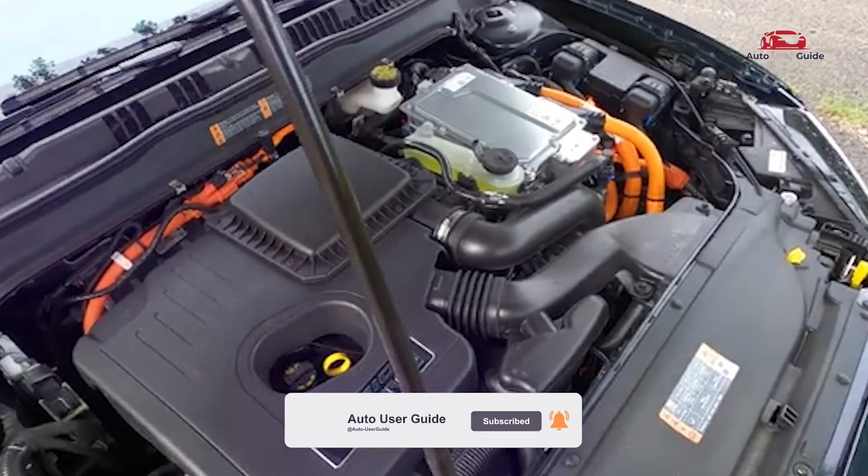In this guide, we will explore essential details about the 2020 Ford Fusion Hybrid fuse box. Where can you locate the fuse box in your vehicle? How do you interpret the fuse box diagram? What are the different fuse functions and their corresponding locations?

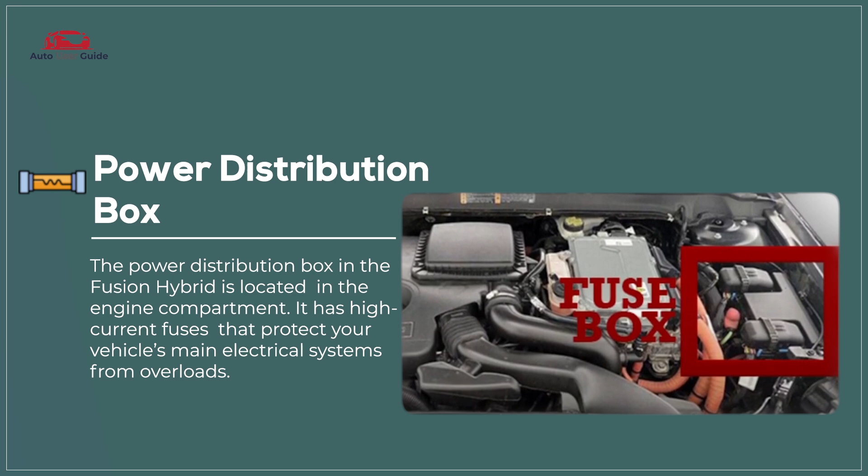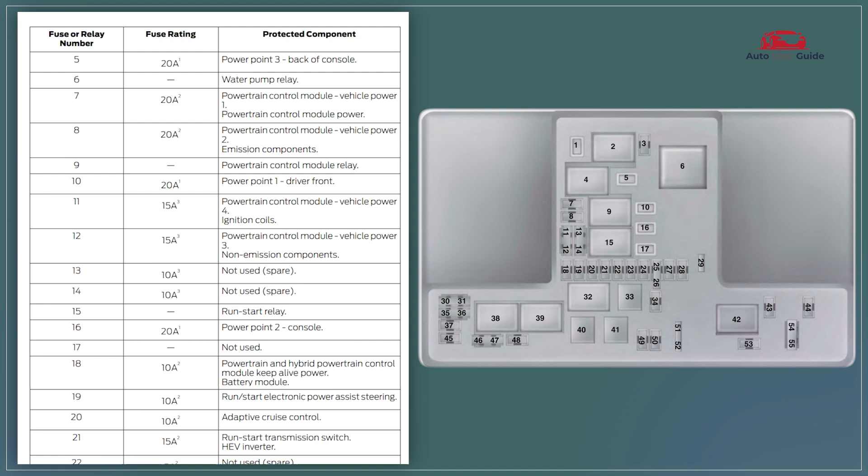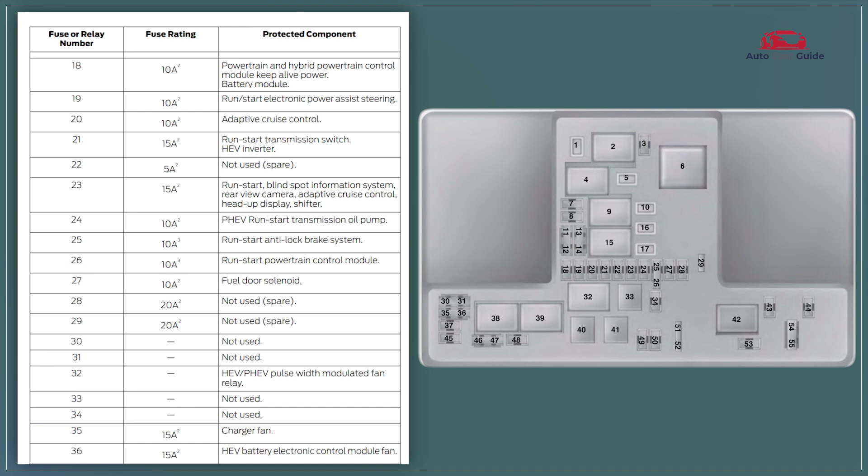Power distribution box. The 2020 Ford Fusion Hybrid power distribution box contains fuses and relays for efficient power management, featuring a compact design for easy access under the hood. It also includes protective covers for enhanced durability and safety.

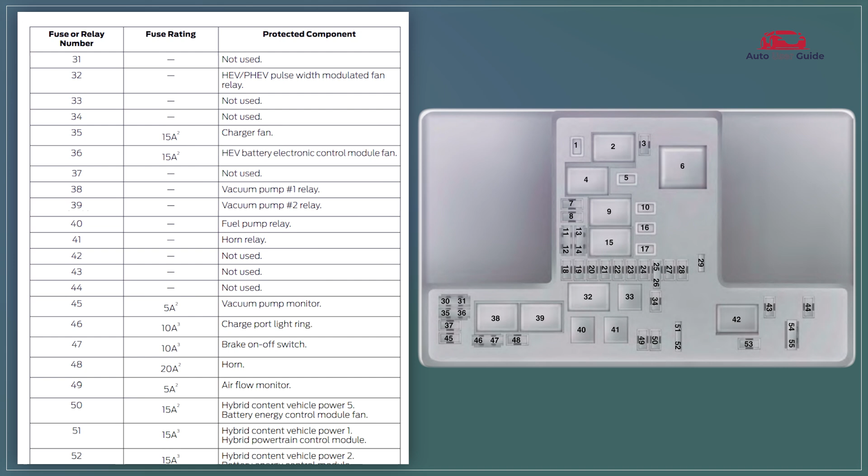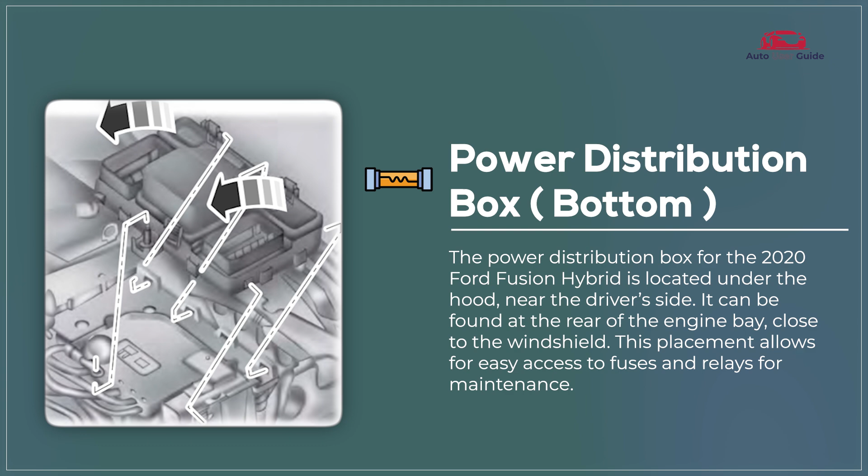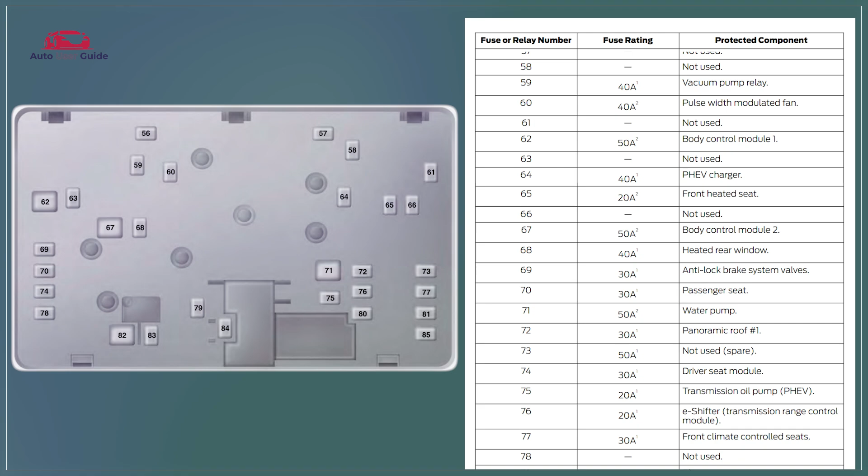Power distribution box, bottom. The bottom power distribution box of the 2020 Ford Fusion Hybrid contains fuses and relays for key electrical systems, ensuring efficient operation. Its durable design and strategic placement provide easy access for maintenance and enhanced reliability.

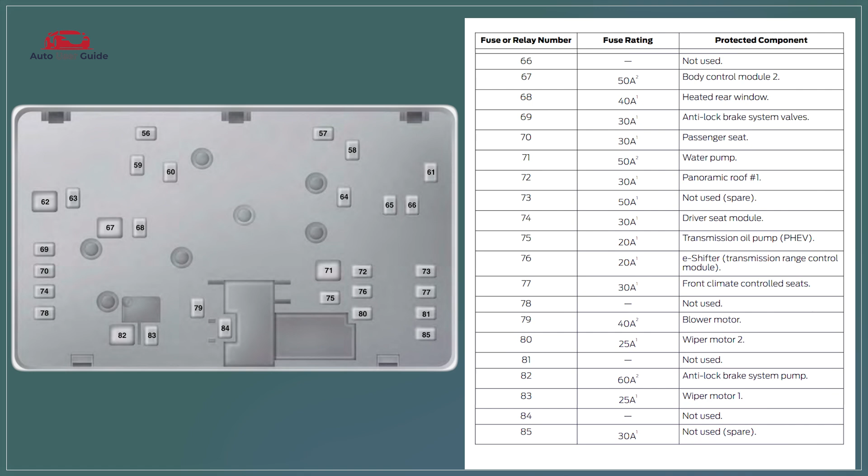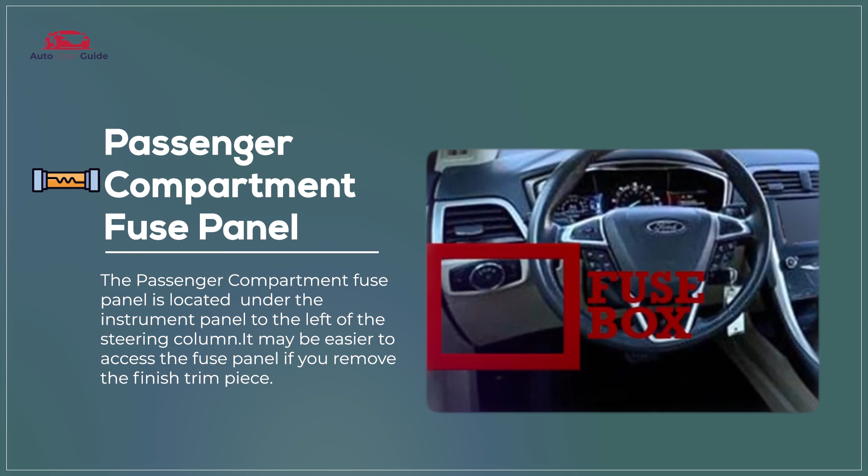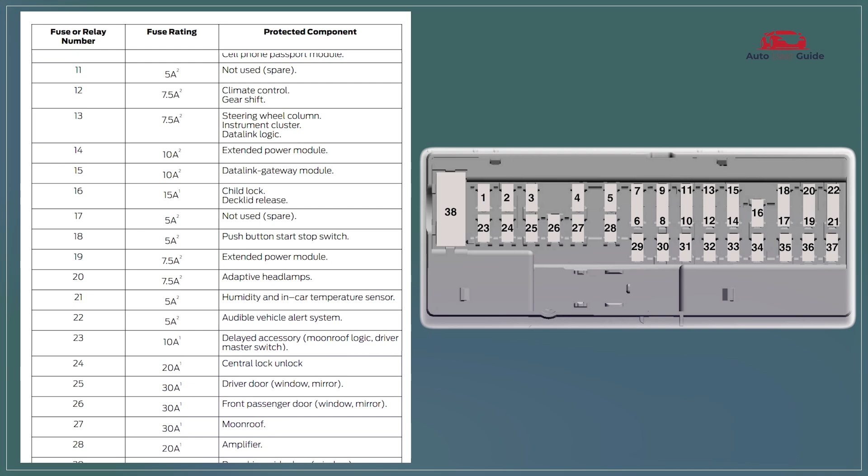Passenger compartment fuse panel. The passenger compartment fuse panel in the 2020 Ford Fusion Hybrid organizes fuses for various electrical systems, ensuring easy access for maintenance. Its layout enhances reliability and safety by protecting critical circuits within the vehicle.

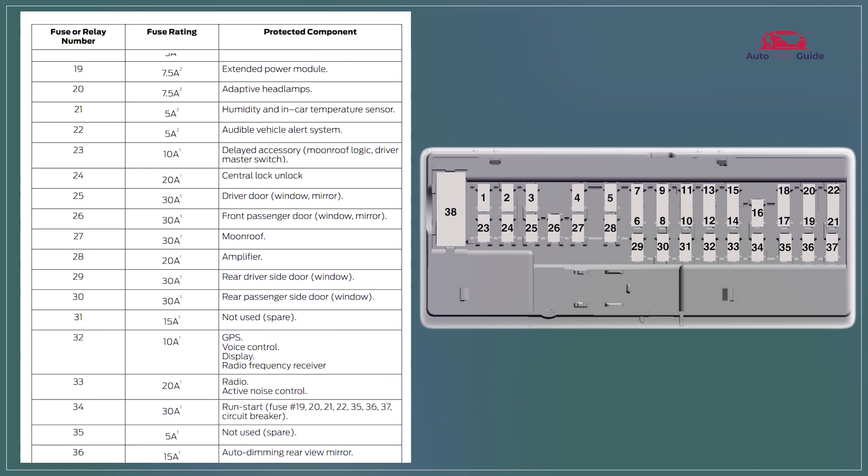Type of fuses: blade fuse, standard blade fuse, mini blade fuse, maxi blade fuse, micro 2 fuse, micro 3 fuse, J-case fuse.

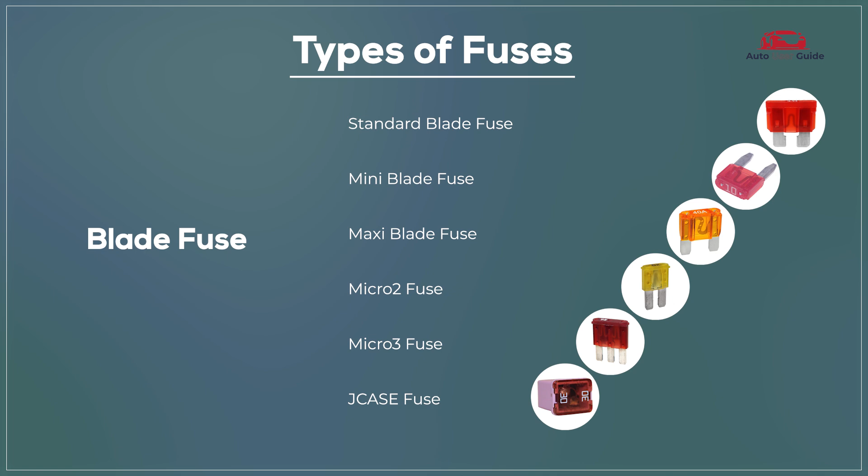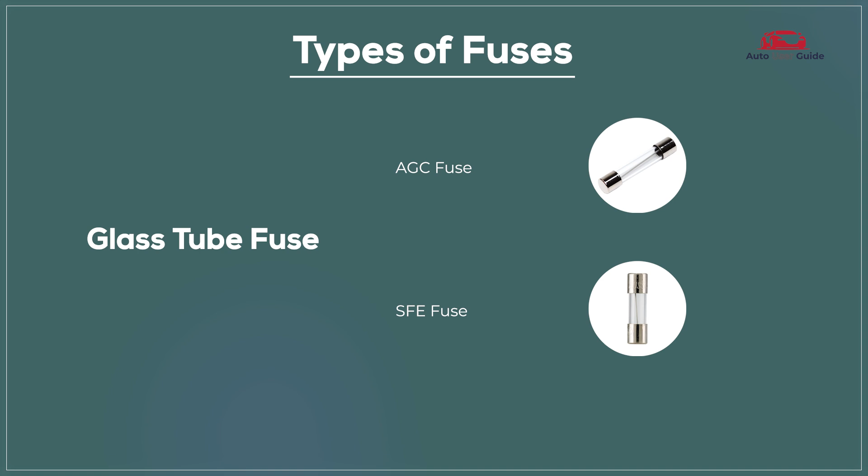Glass tube fuse, AGC fuse, SFE fuse. Ceramic fuse, Bosch fuse, DIN fuse.

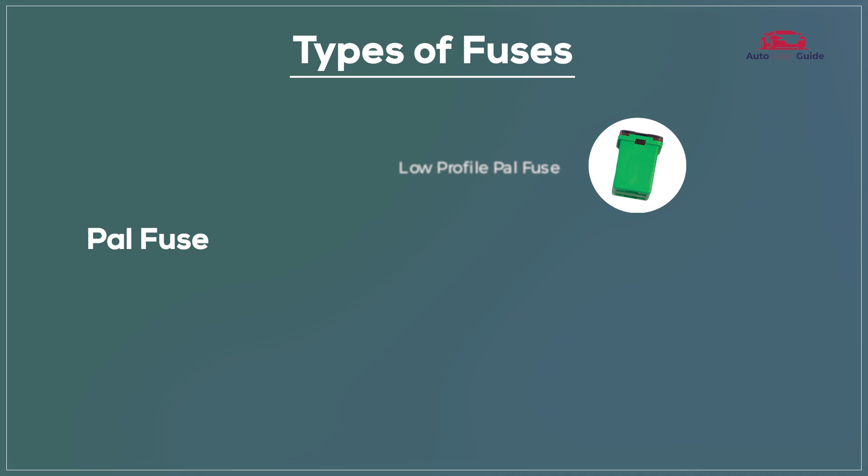PAL fuse, low profile fuse, standard PAL fuse. Link fuse, mega fuse, high amperage link fuse.

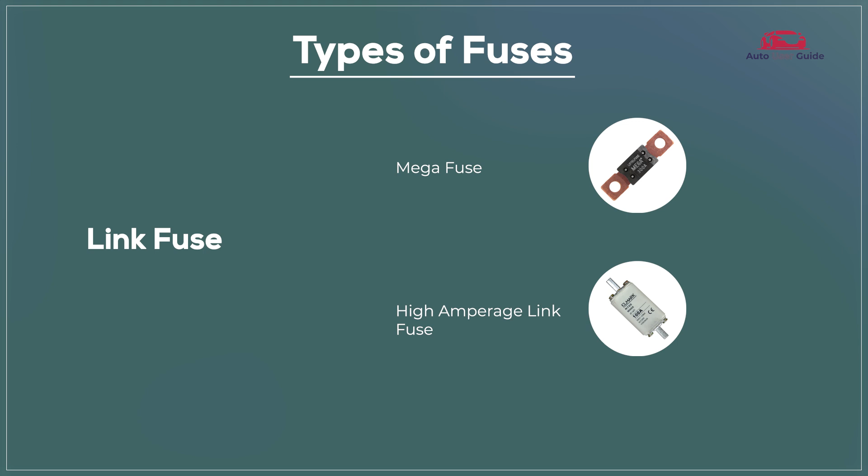Fuse conditions: blown fuse. A blown fuse means it's no longer functioning and needs replacement, while a perfect fuse is in good working condition and performing as expected.

How to change fuses: turn off the vehicle, locate the fuse box, identify the faulty fuse, remove the faulty fuse, inspect and obtain a replacement, install the new fuse, test the replacement.